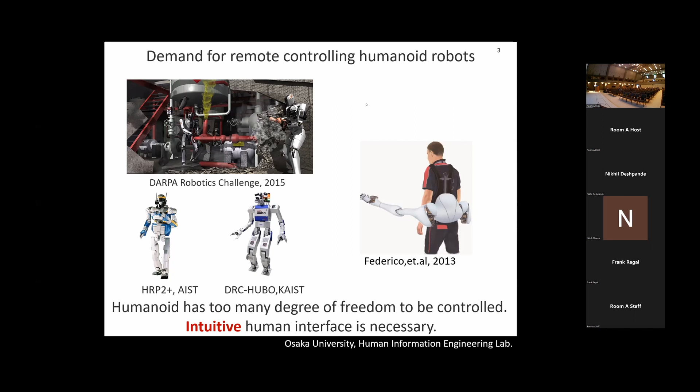I'm working on the TELESAR V. The TELESAR V is the fifth series of the telexistence system, also known as a telepresence system.

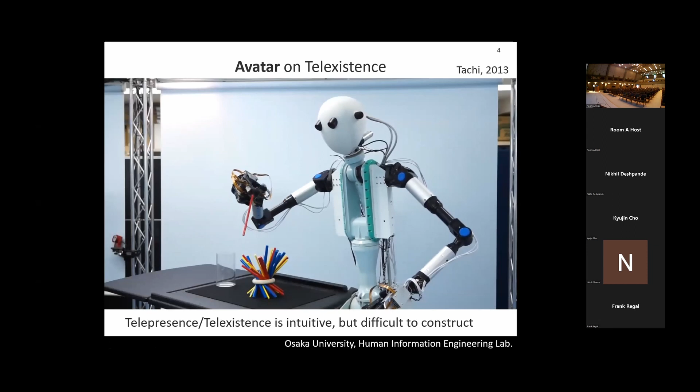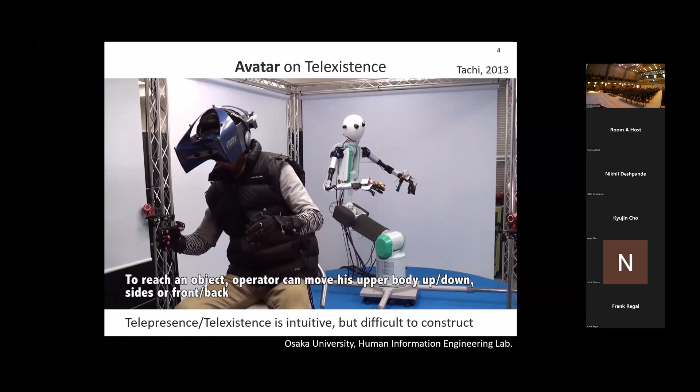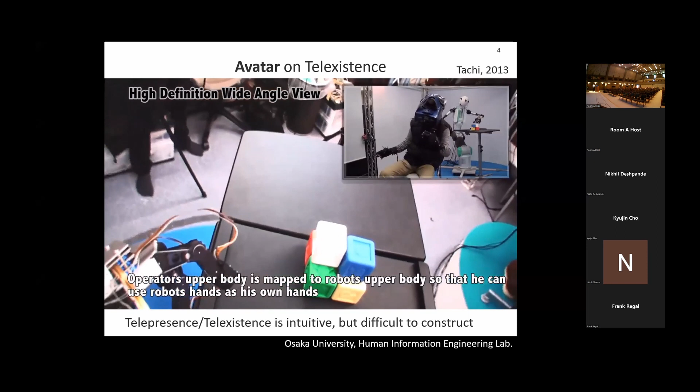Let me restart. This is the TELESAR V. I was working on this project. The telexistence system requires us to transfer our bodily behavior into the remote place, and the robot has to realize our behavior level. Also, we can perceive the remote perception, including vision, sounds, and haptics. In this video, you will perceive it as your own body with the robot itself.

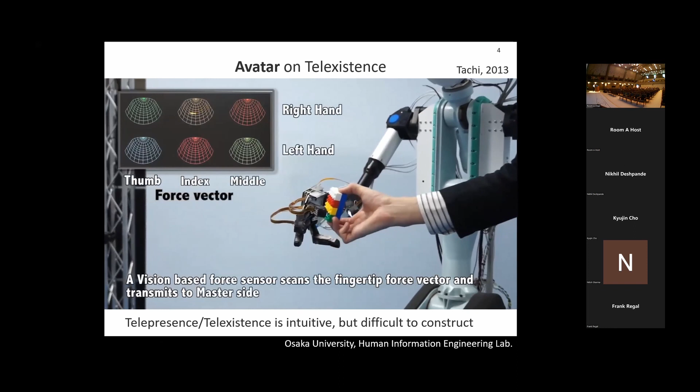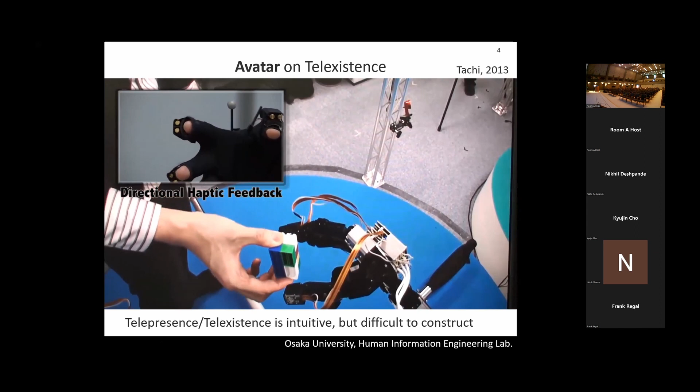But the telepresence or telexistence system requires us to build a complex and expensive robot sometimes, and it's very difficult to control intuitively by human. The easiest way is to measure our behavior movement with a motion capture camera, and also any body movement measurement system.

But there are two issues to do so. Firstly, the robot is very expensive and very complex. The Tsumori-Control allows you to use a very simple and cheaper robot as shown here. This is a hobby purpose robot, but it looks like a humanoid. Then if you can control this robot as you think...

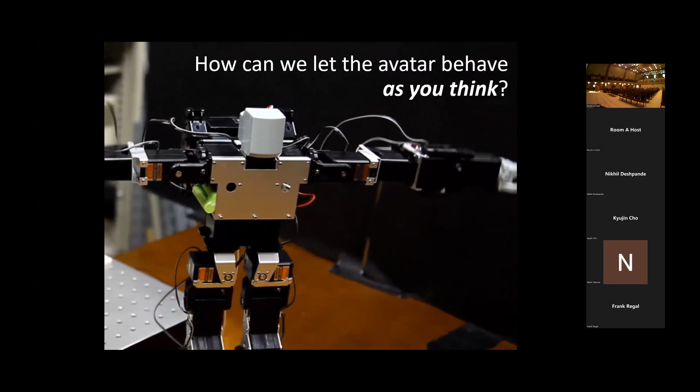But there's a second issue. How can we do that? Especially, I try to introduce this way: do you imagine how you can control this humanoid robot with only two sticks? I will introduce how.

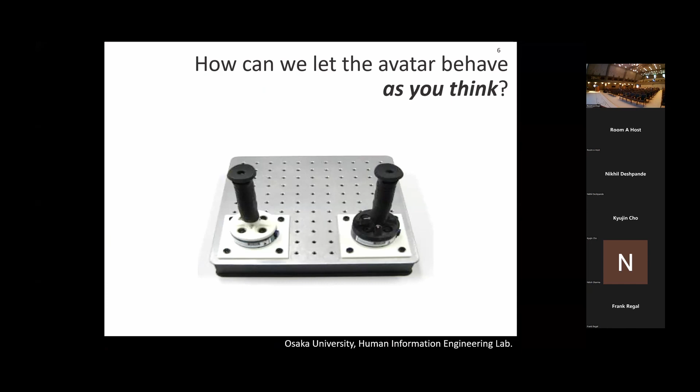The keyword is Tsumori. Tsumori is a Japanese word, very simple word. Please remember Tsumori. We consider Tsumori as intention, especially behavior intention. Behavior intention is - please take a look at this video, the small window. The behavior movement is continuous.

Continuous behavior - when we see continuous behavior and try to imagine that, please realize this continuous behavior, for example punching and kicking and so on. When you remember this kind of continuous behavior, what we do is split it into static or specific frames, several in number. Then when you perform this continuous behavior, you combine these static frames into one unique continuous behavior. This is a reproduce sequence: when you see some continuous behavior, you reproduce that unique continuous behavior. So we think of the discrete part as a memory. We can say that Tsumori equals intention as well as memory. So Tsumori works as a memory - that is the first message.

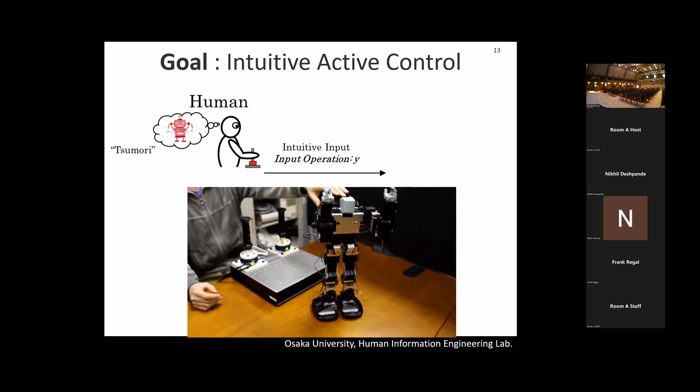The goal scenario is like this. The user has some behavior, continuous behavior as Tsumori. Then they decide to perform this behavior as a robot. They push the two sticks, and then the robot will behave correctly.

This is the goal sequence of Tsumori-Control. The starting point is human, the goal point is robot. The succeeded scenario has the correct intention realized at the robot.

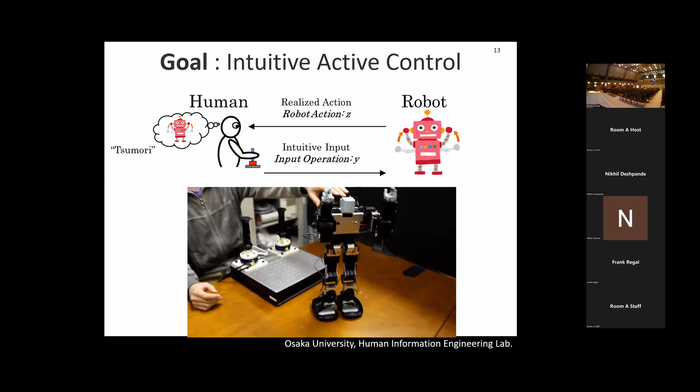The Tsumori-Control system will have an additional sequence. We call this extracting the intention sequence. The extraction means binding this force pattern to this motion pattern.

The starting point was different from before. This time, the starting point is the robot. First, the robot moves automatically, then the user looks at the behavior.

Then this is the key point. This user is asked to push the force as if they control the robot at this time, in real time. After that, we can obtain this kind of continuous time series data set based on this continuous behavior.